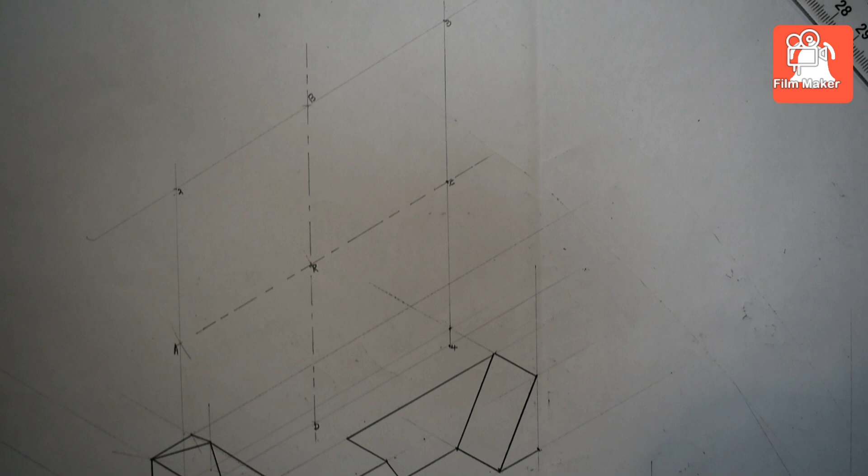I'm going to take my 30cm ruler and join the two longest opposite corners. Let me repeat that, since the camera for YouTube was off already.

So we created a square. The reference of this square, how did you start it? We were given the dimension of 50mm. This 50mm is a height going up, recorded right from here.

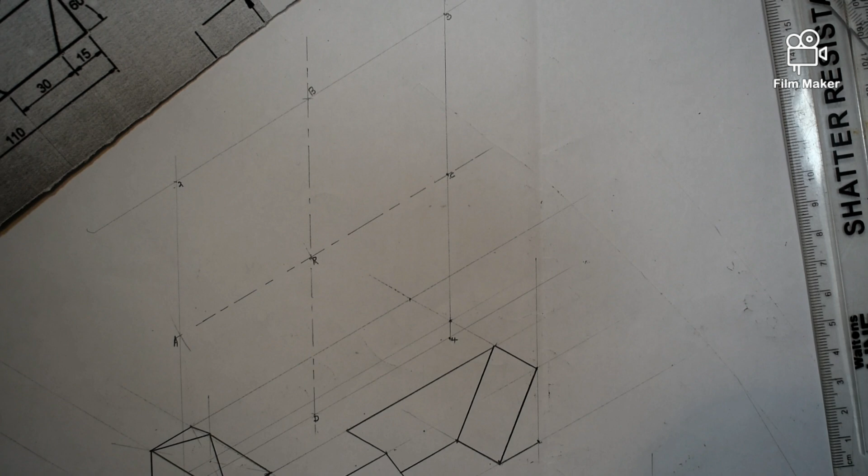How did you go to this point? We got to this point by recording 15 from here till here. Remember, this point is actually tallied with that one, which means it's the back part of your view, of this drawing we're doing. You can still say 15, which is that one, and 18, which is this one, so you get this point.

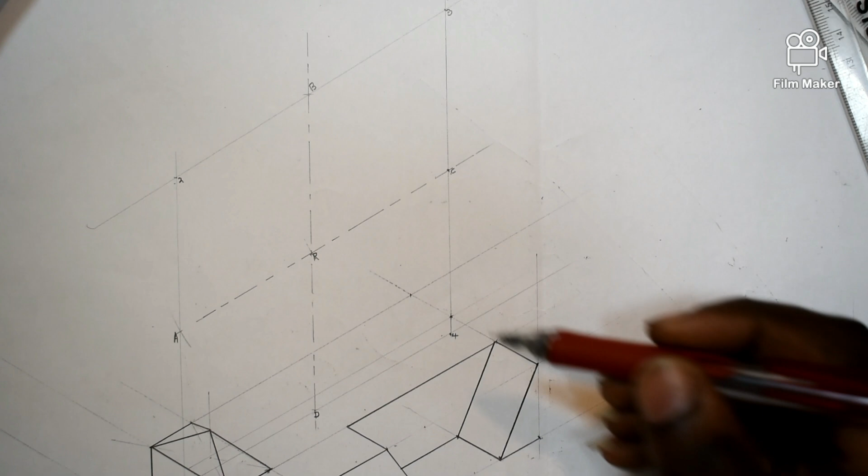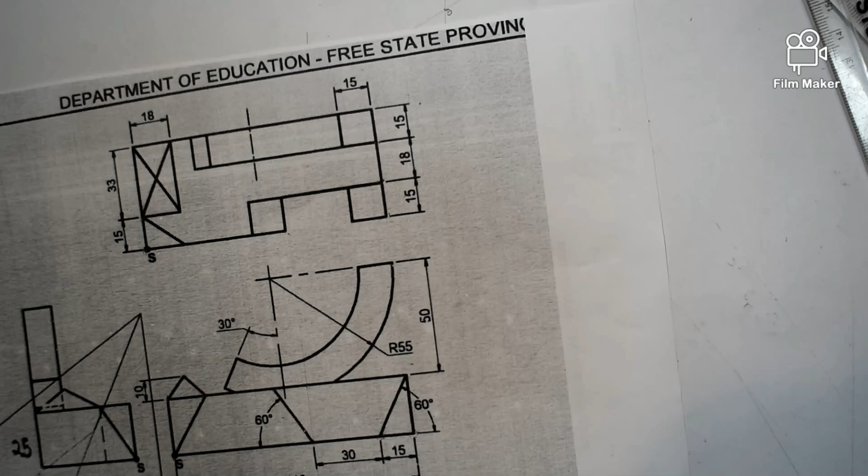You take this point vertically up, which we took. Once we took this point vertically up, we then recorded 50 - from here till there is 50. That 50 gave us the reference line on how we're going to create our box. It's the one that guided us.

So since this tallies like this, we do not have any point beyond this line - you can rely on that. Because we do not have to get any point, we then rely on where your point 50 ends, and this 50 you can even easily see it there by your right view.

It's giving you the horizontal center.

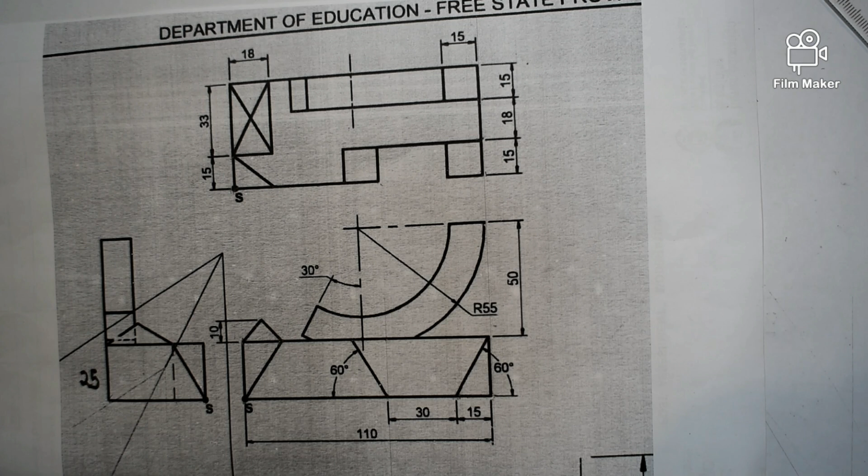All right, let's continue. So this 50 gave us the reference of the horizontal line - our 50 ends there, then we draw this one.

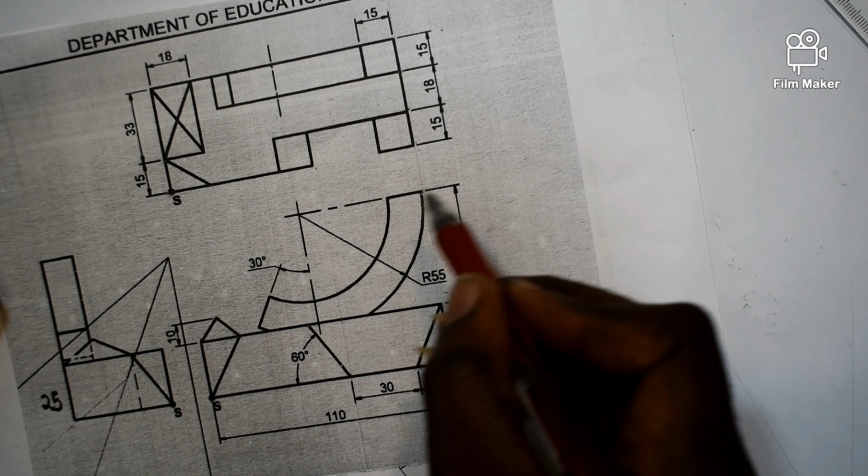After we draw that one, we then want to get this radius 55. Isometrically, we have to follow the isometric method, so it's radius 55. Then open your drawing compass to 55.

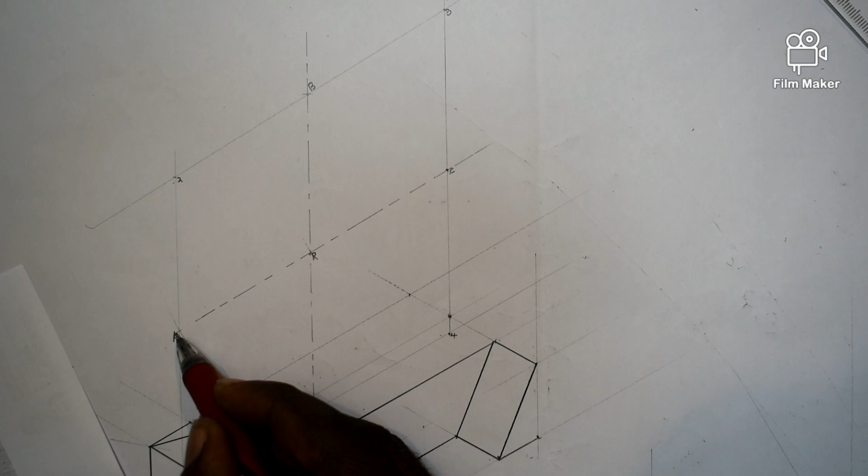Then you place it here, then you mark here, you mark here, so that from here till here is 55, and from here till here is 55. Then the first one that you got, we then say it's our horizontal, our vertical center, which is this one, and it's A1.

So let's continue - I just repeated this because the camera for YouTube was off and I didn't realize it.

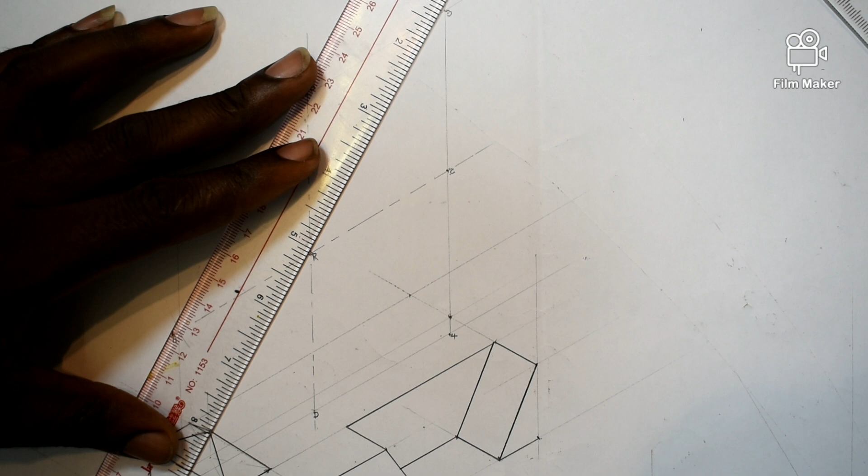Now it says join the two longest opposite corner, which is 1 and 3, and this line has to pass exactly point R. If we are at the right track, 1 and 3, you can actually see it's passing exactly point R. So which means we are still at the right track, my guy.

So all the points or lines that we're doing at this moment, they're supposed to be faint.

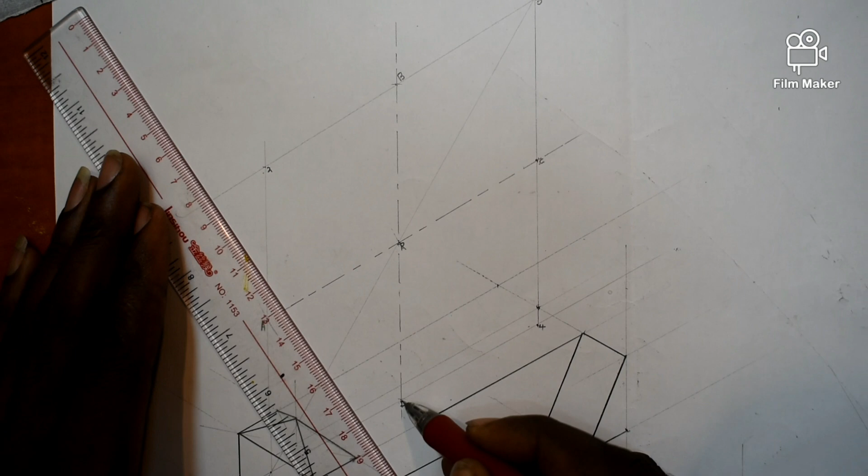All right, we've joined the two longest opposite corner. We're going to join the center to corner, corner to center. So D, which is the center, to 2, which is the corner - corner to center, center to corner. Remember, is that one, which is B and 4.

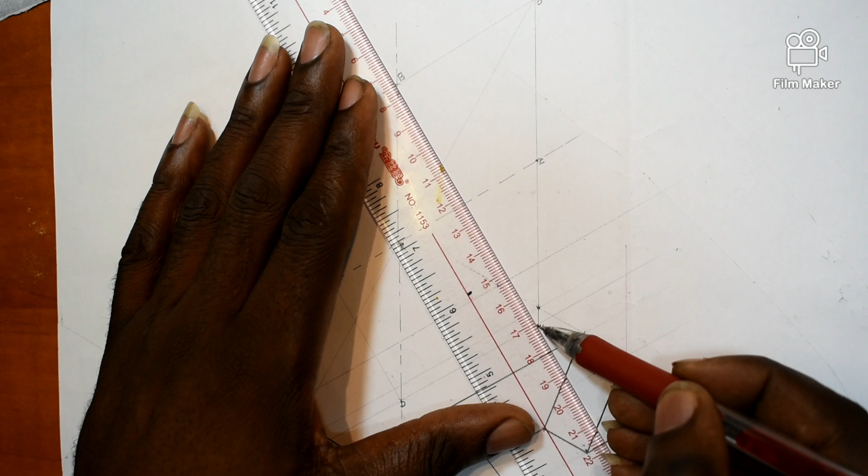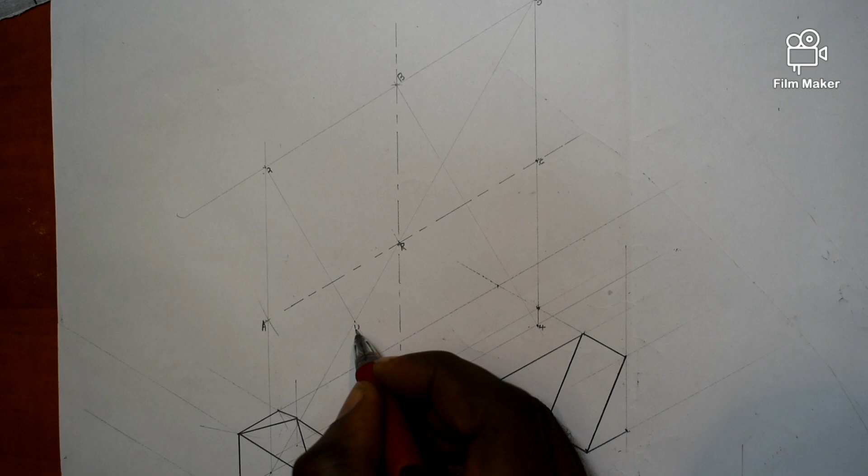There you go. Right, the time we're joining the corner to center, center to corner, our longest line was cut. So this one is going to be Roman figure 1, and that other one is going to be Roman figure 2.

What do we need actually - do we need these Roman figures or what? So now I want to start by getting this arc of mine, this arc of mine.

You have to be very careful - I'll be very slow when I'm doing this one, so that we understand it better. It's supposed to generally go up until at your vertical center line on it, but double check your right view is cut. So which means, how are you going to get that?

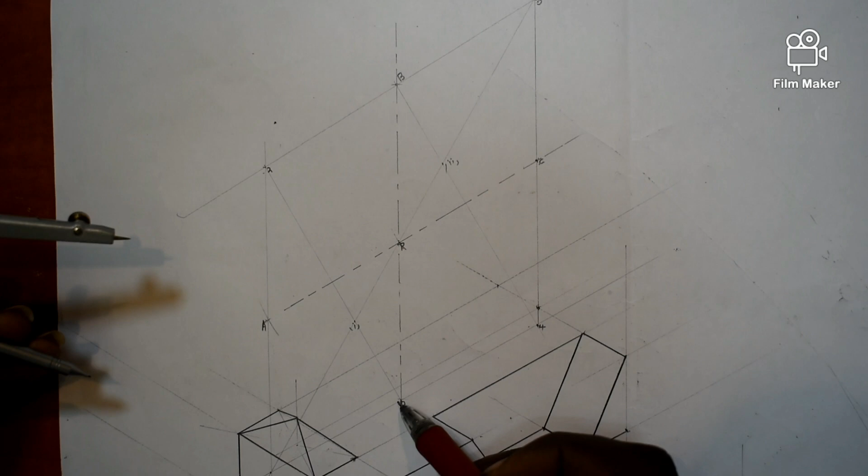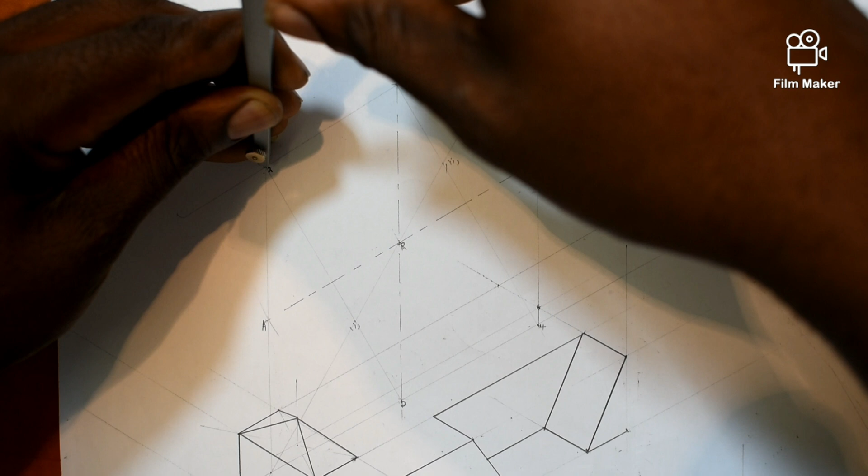You're going to use point 2 and C D. Place it at 2, supposed to be big, 2, there is 2, further extended to C and D. There you go.

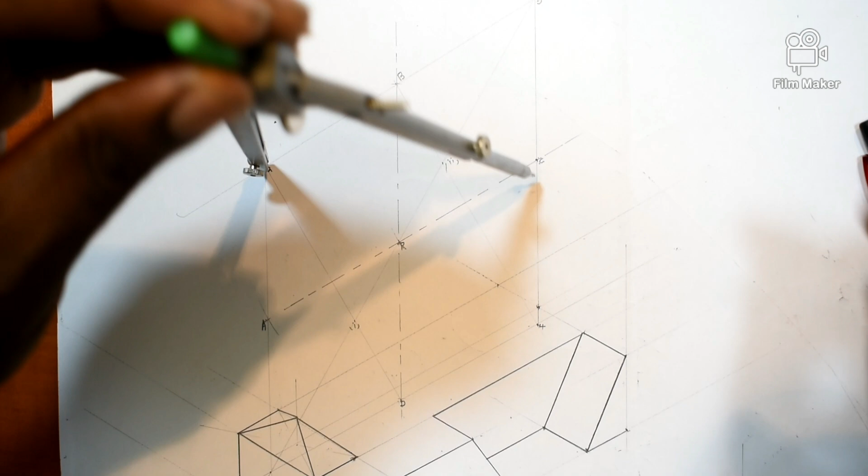Draw it from C, dark. Remember, where do you have to stop? Trace it, dark, dark, which means I have to stop here. Because from here till at C, supposed to be faint, till at D supposed to be faint. But from here till here, supposed to be dark.

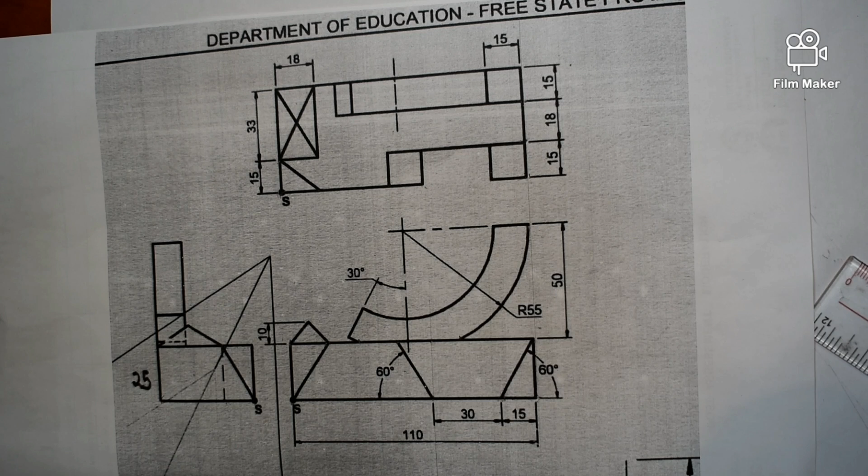So which means, as from this point, it has to be a horizontal straight line. As you can see it right from your right view, it's a straight line. It's going to be a horizontal straight line till where we let it come out by itself, so it's not going to be dark till there, you understand.

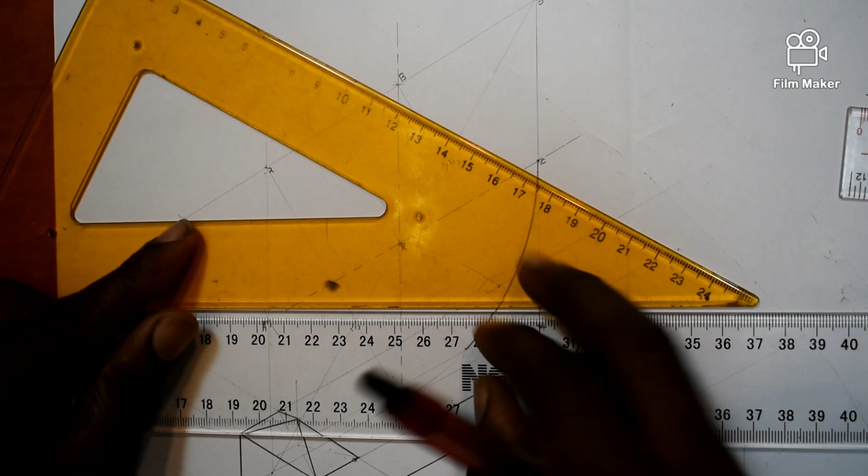Once I get that, rely on these points, rely on these points. Now I can come back and take this point C a little bit back, you understand. But this is the thickness. We are told it is of a thickness of 15 millimeter, going this side and going this side.

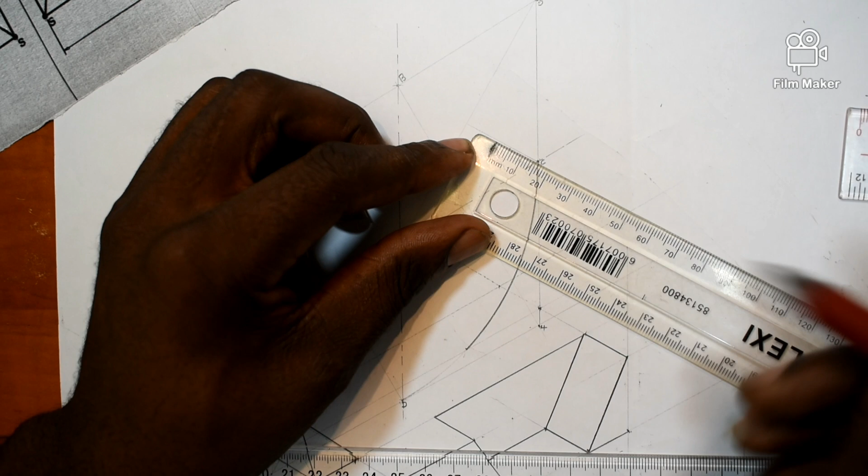So which means I can simply record the 15 millimeter till there, dark on it. You understand? So again, this side, dark. From here till there.

So you must always have strong points to rely on. You must always have strong points to rely on. So from there, where is my ruler now?

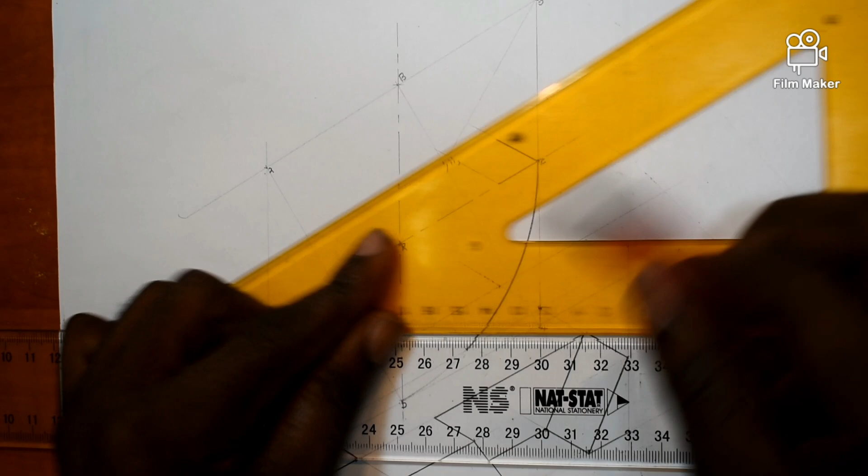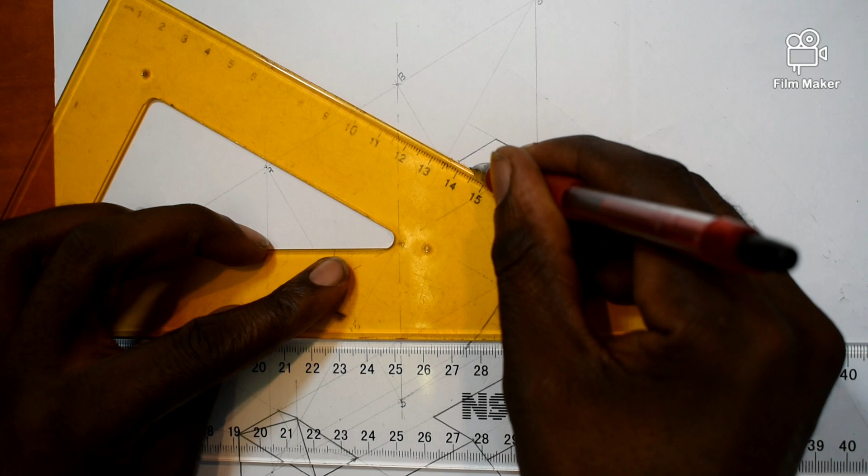So now, just construct this one faint, and have it dark from here till right there, you understand? And from here to right there, dark, you get it?

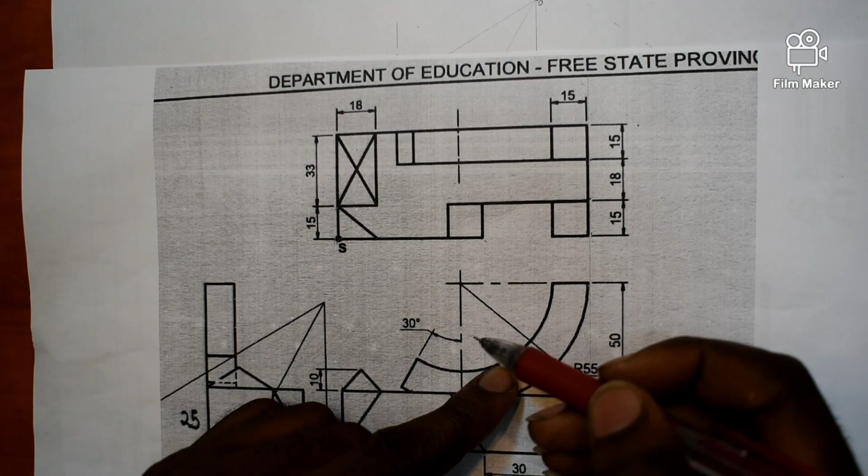Right, so what is going to happen now? So this arc of radius 55 is actually parallel to this one. So hence, if these arcs are parallel to each other, I can then rely on where you were placing your drawing compass the time you drew this arc.

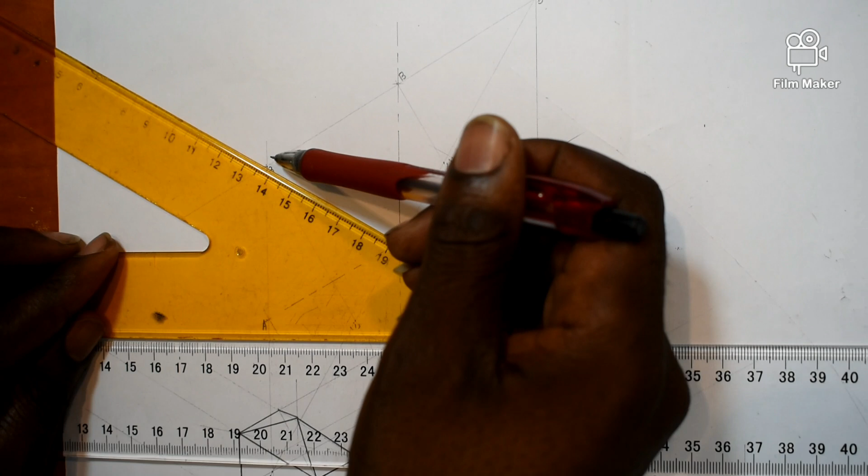You're placing your drawing compass way at point 2. So which means take this point 2 a little bit back, my brother. There you go, you understand? And then come to say that is from here till here is 15 millimeter, which is this one on it. So which means I can record the 15 millimeter from this point 2, from here to right there, you get it?

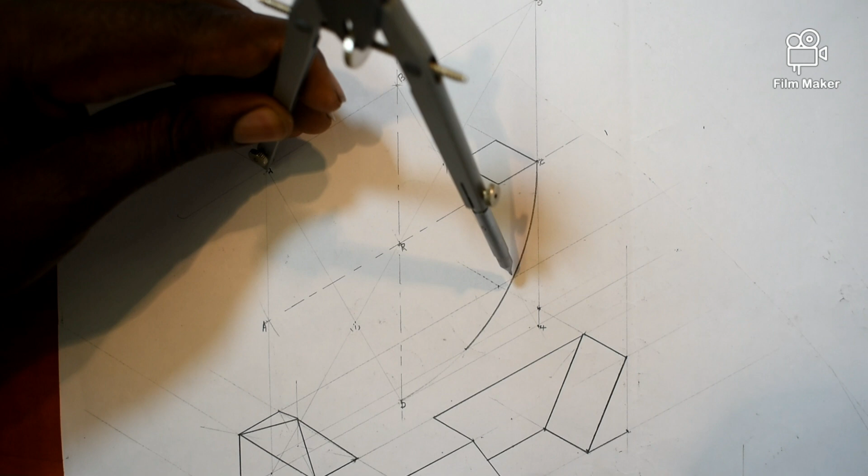Open it. If you don't do this 15 millimeter, you can simply just place the drawing compass at point 2. Okay, I drew this arc like this. Now you'll be placing it along this line, but putting your pencil lead way at this point. You understand? So now, bring back your question.

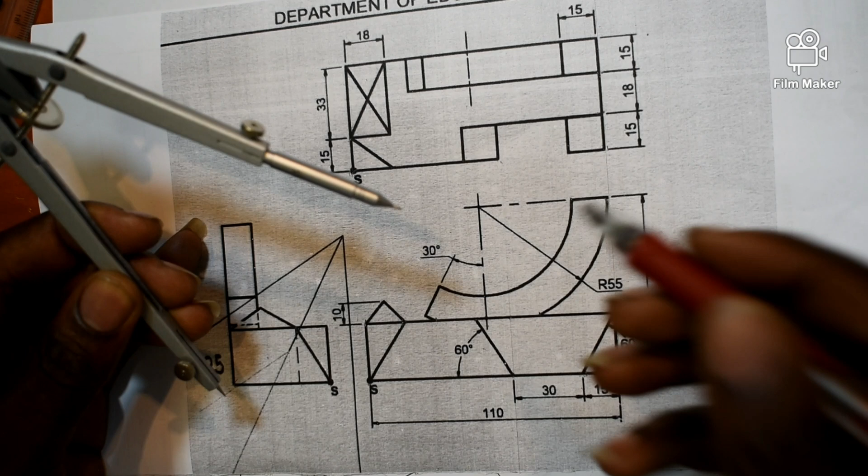And now, what I know is that it's supposed to start from the horizontal center to the vertical center to be dark. That's what I have to rely on when I'm drawing the second one. So, place it here where your 15 ends, which means come back a little bit. Understand? And then now draw it from here to right there, dark.

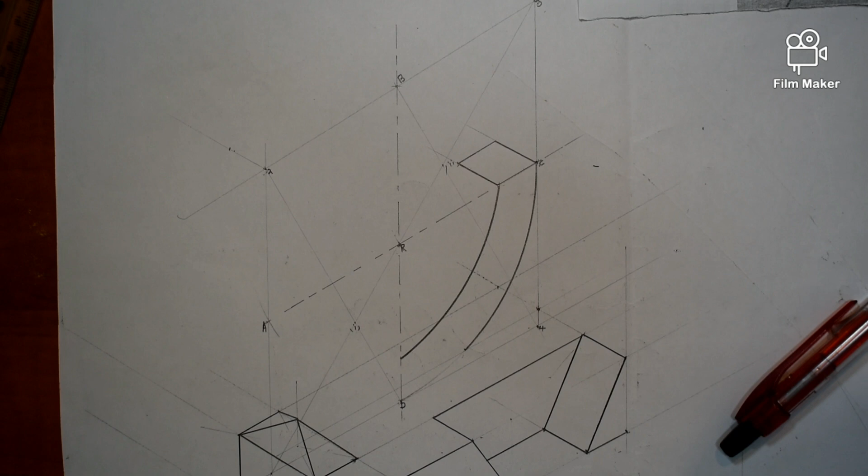So you must always have points to rely on. You must suppose what I see is that the second one, we can see it clearly. You understand? Starting from here till, but the first one is actually vanishing out there. You understand? So it's supposed to be like this.

At the moment, I can mark till somewhere here, even though I can see what is continuing till somewhere, but at the moment, let me leave it here. So now, what is going to happen now?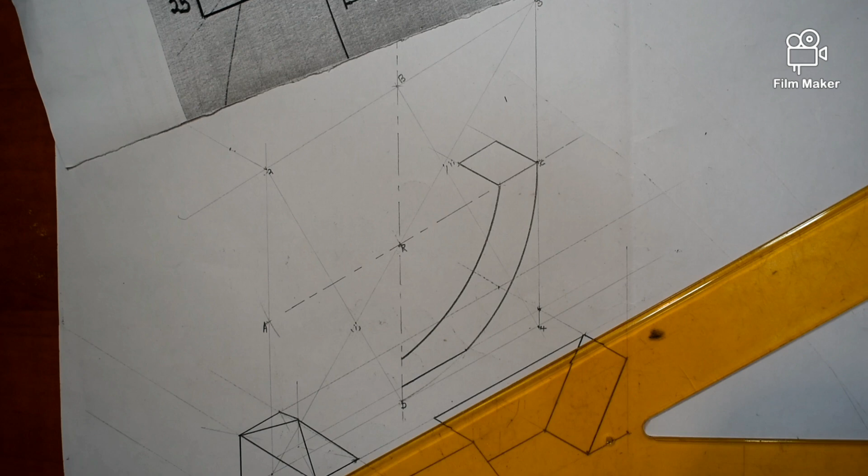Check this. If we were drawing the full isometric hole, we were going to use what? Roman figure 1. Place a drawing compass at Roman figure 1, further extended to what? To A and D, which is this one.

You see it's coming nicely, which is D and A. I'll draw it faint at the moment because there is something happening here. Understand? Okay, so now we are facing this angle now.

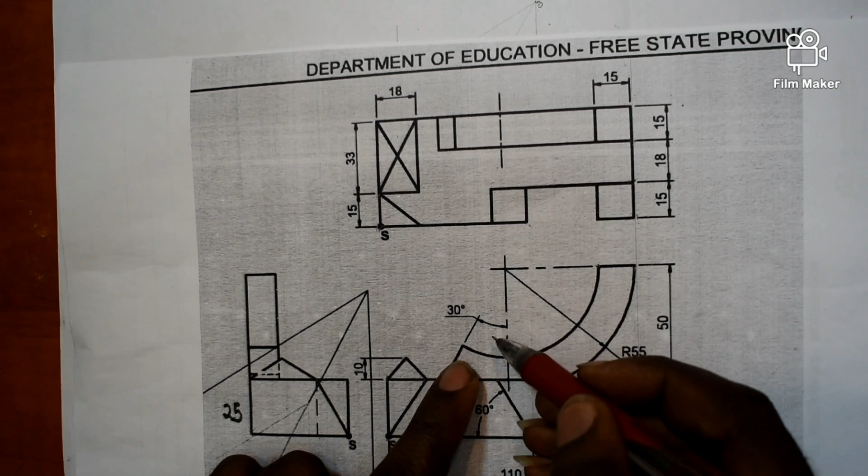Okay, now let's go back and deal with it on true angles and true dimension. I'll just come this side. Let's construct a faint horizontal line, vertical line, and the horizontal line.

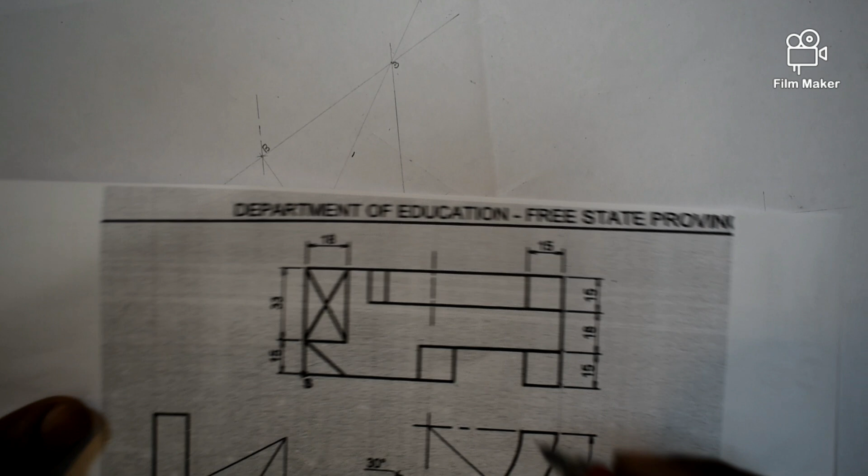Okay, from this point I want to open angle 30 degrees, because the set is angle 30 degrees, you understand. So this is angle 30 degrees, angle 30 degrees on it. There you go, faint. There you go, faint.

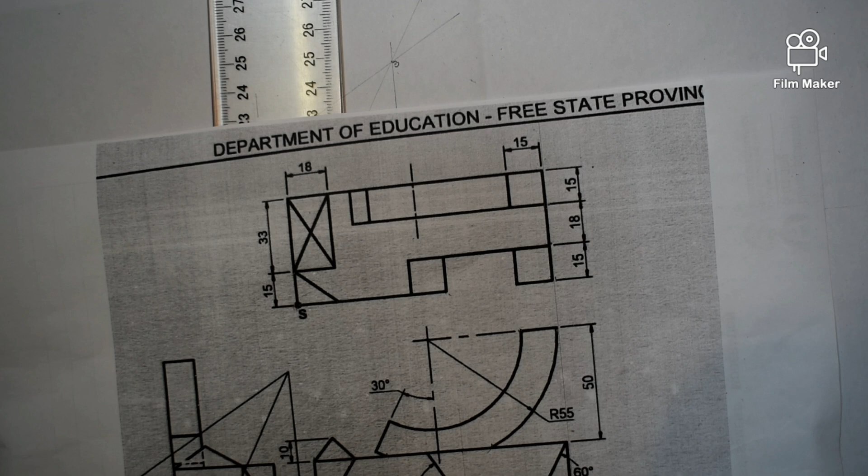Now, again from here till here, from here till here, I will even start with the 55. So I'm going to open my drawing compass to 55 radius, 55, which is that one. I'm actually looking for that point, you understand, that point. So open it to 55.

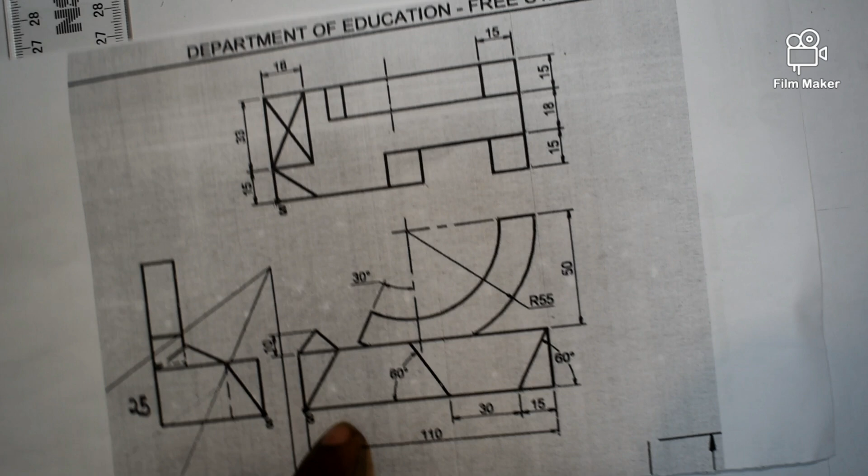55. There's 50, this is 55, you get it? Then after that, I come back to my auxiliary. I place it here.

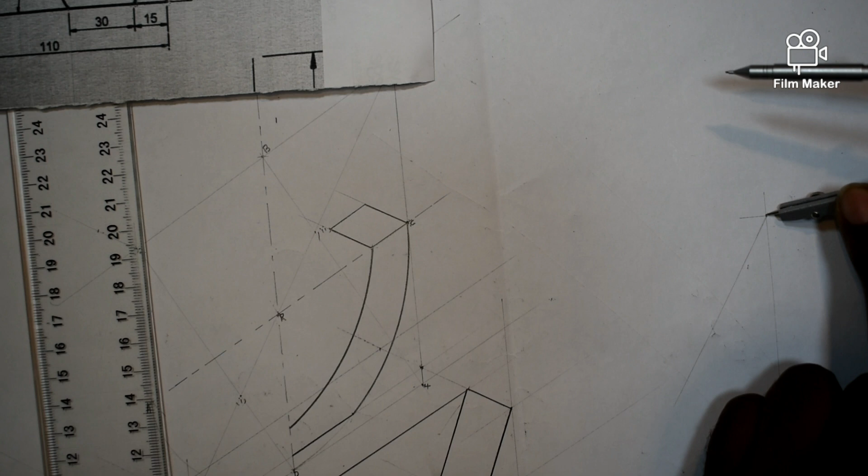Strike the arc of 45 of 55. You understand? So I've already gotten what I'm looking for.

So what I can do now, in other words, that is in my drawing, in my auxiliary, is right there. This D, this one in my auxiliary is somewhere there. Not even somewhere there, is this one. So now I can simply place my drawing compass at D.

Further extended to this point. Then from there, I come to my work and place it at D and mark along this arc that I just struck.

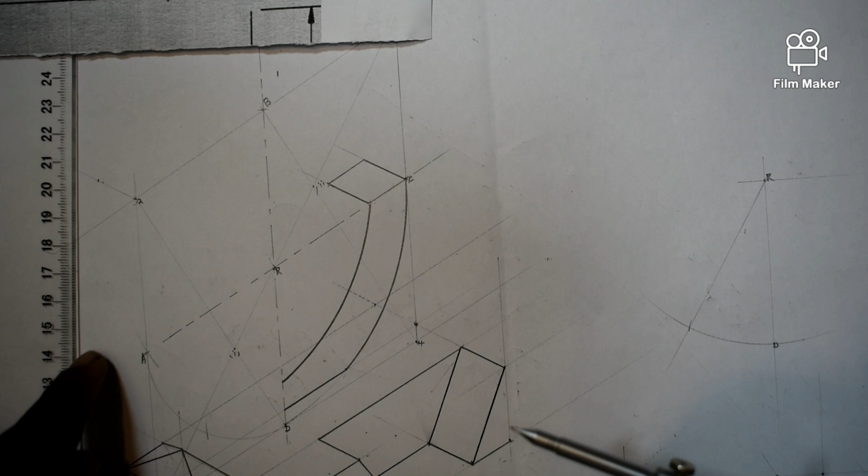After that, I'm gonna take this point to my R. It's good as if I'm getting this one from here till here. Take this point to my R. There you go.

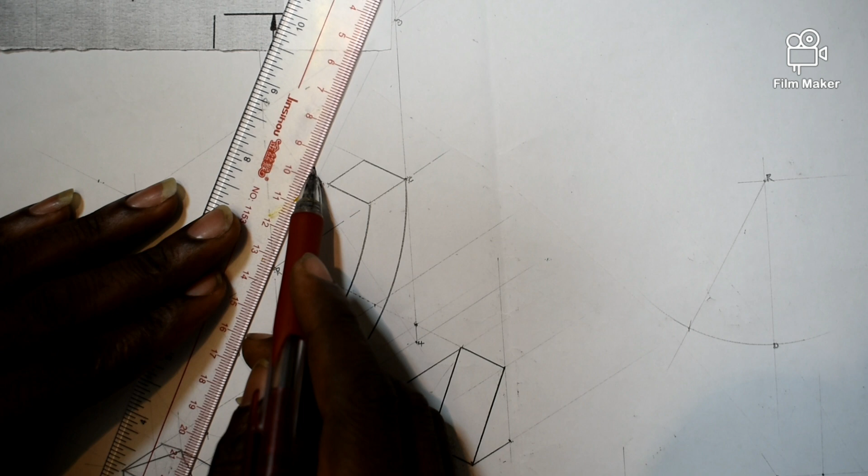So it is the one that is going to guide me now. I can go back to my Roman figure 1 point, place it there, further extend to A, isn't it?

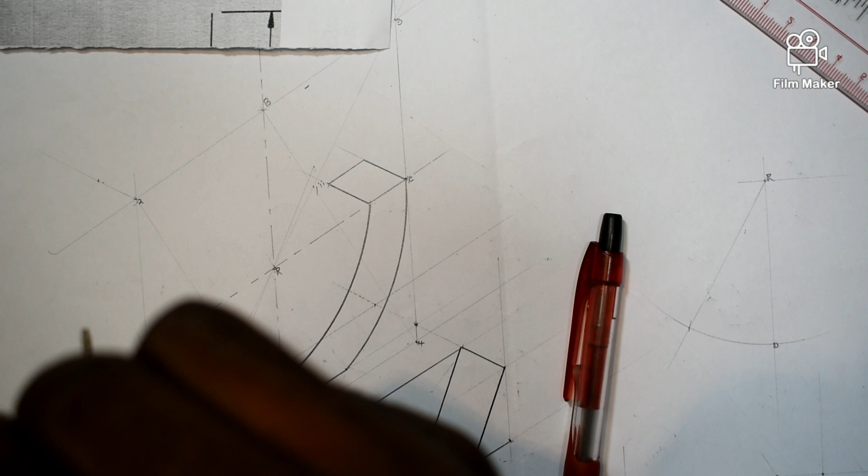But then I now draw dark from here. Check it nicely. Open just a little bit. Can now draw it dark from here.

Keep on shifting. Be careful from here till there. It's just a small gap. That's how it's going to be dark, my guy.

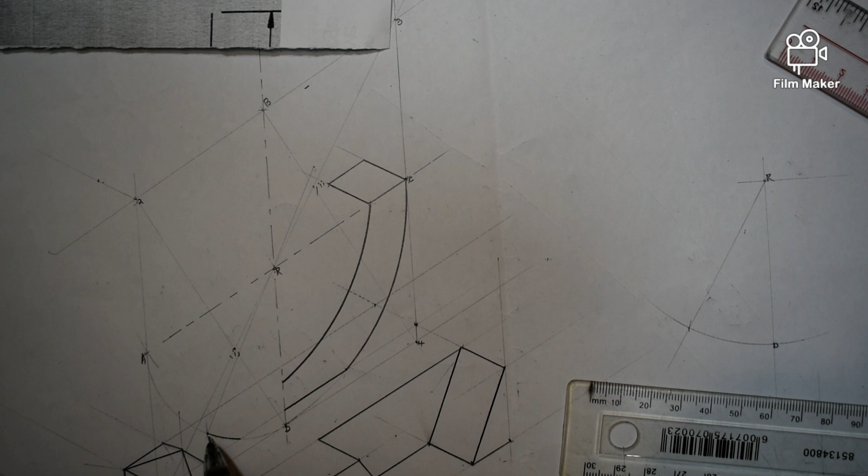From here till at B, if it was a full hole, it was gonna go like this, go like this. You start remembering it. Go like this, go like this. So it takes somebody to understand what isometric hole is. So the one that we have, it will be only dark from here till here.

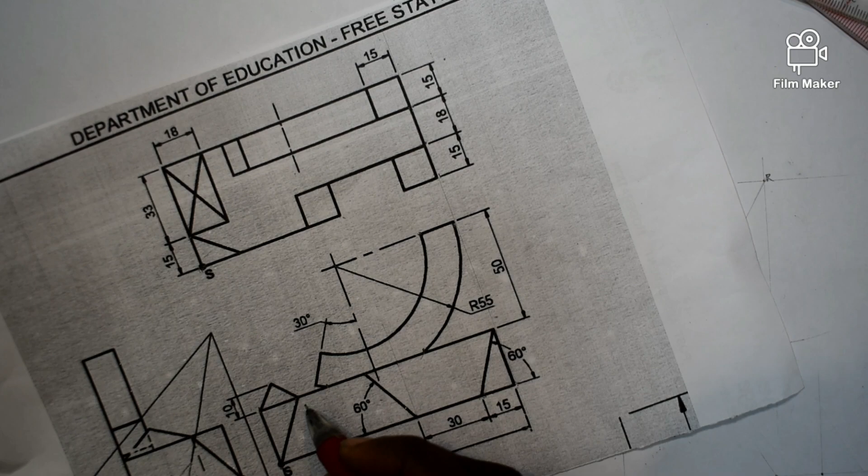So which means I can come back and record and have this one now, not faint, dark till right there. This one from here till right there, we've already gotten it. From here till right here, we've already gotten it. So now from here till here is going to be the same 15.

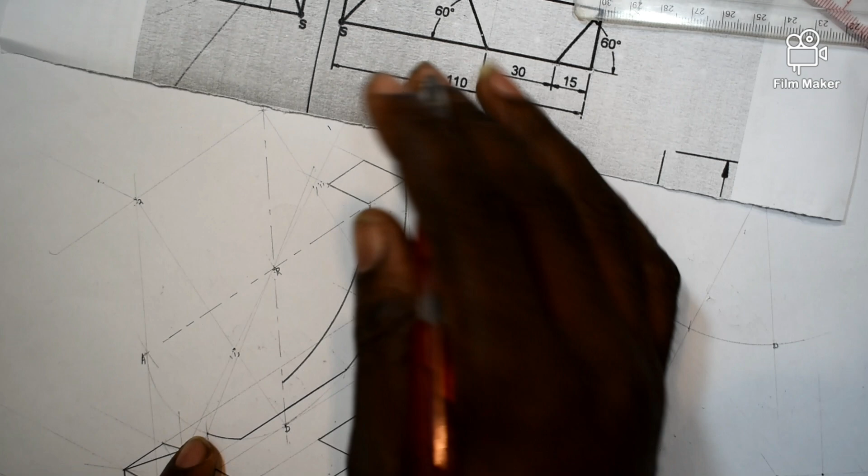It's up to you whether you record the 15 or strike the arc. But I would prefer you strike the arc. Pretend as if you are drawing the small one now, because if you were drawing the small one, it was gonna go from here, full hole, full hole, full hole, full hole.

You understand? So it's all gonna be like that, so that you have this one solid, which is going to be that one. Actually, we are done. We are done.

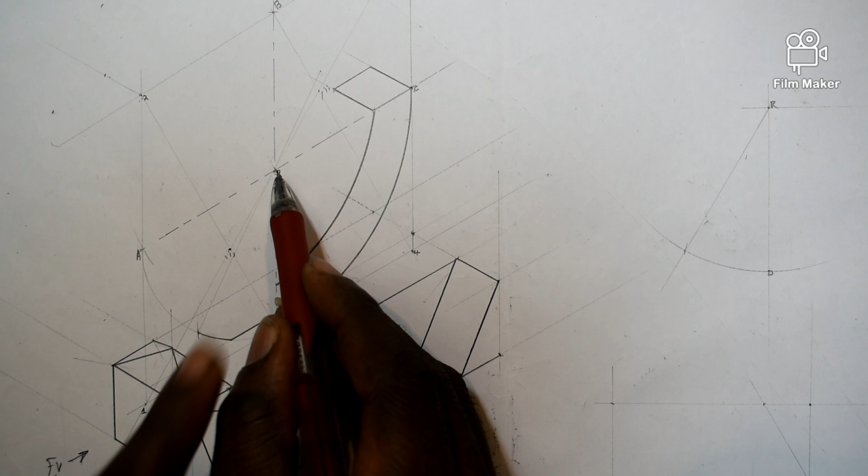Right, if I'm to such an extent, you know what I'm gonna do now? I'm still sticking to the very same R, radius R. I mean reference R. How? By placing my drawing compass at R, further extend to this point, and I mark here, and I mark here, and I mark right here.

Do you see that we're on the right track? Do you see? It's actually coming straight. If I'm placing my drawing compass from here till here, it automatically aligns with this one from here till here, which means the time we drew this arc, we were 100% correct.

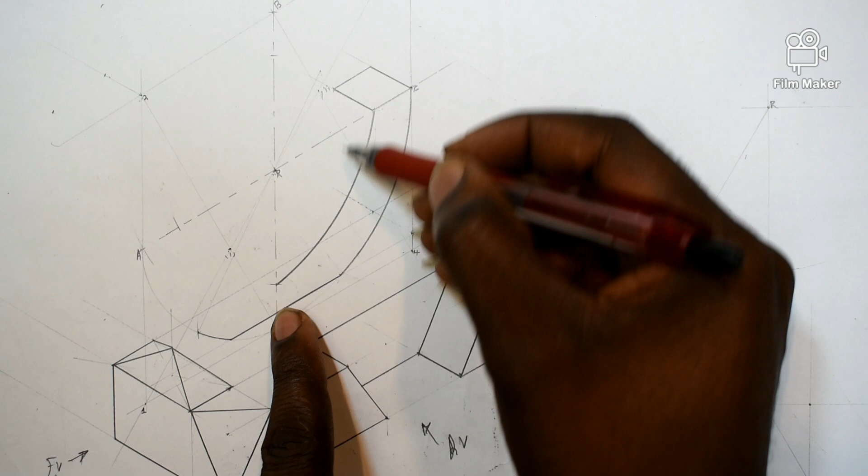Understand? That's what I like about drawing, because you can simply correct yourself. If you are going out of order, you can correct yourself to know why it's not tallying. So your dimensions must tally.

So now, which means I'm creating the smaller square. Paint with this one, which is going to be this one. There you go. The other one. There you go. The last one.

There you go. Do you see that it's still at the same longest opposite line? Check our work. You see that it's turning exactly at that point. Even this one, there it goes, it's turning exactly at this point. You are on the right track.

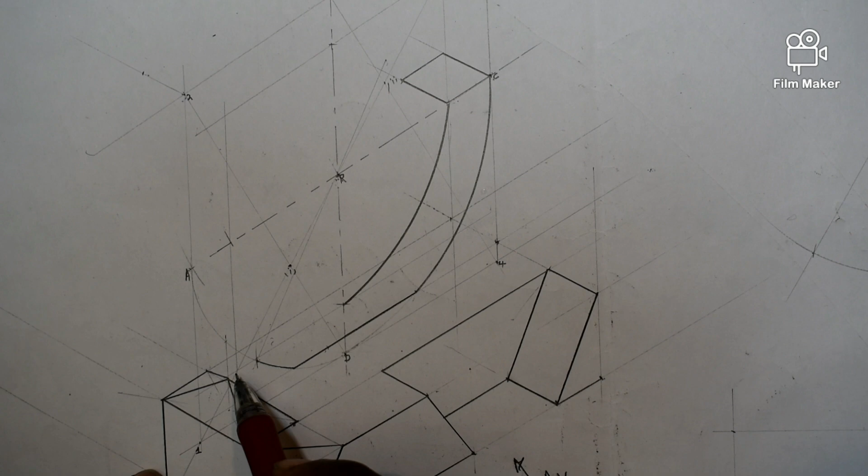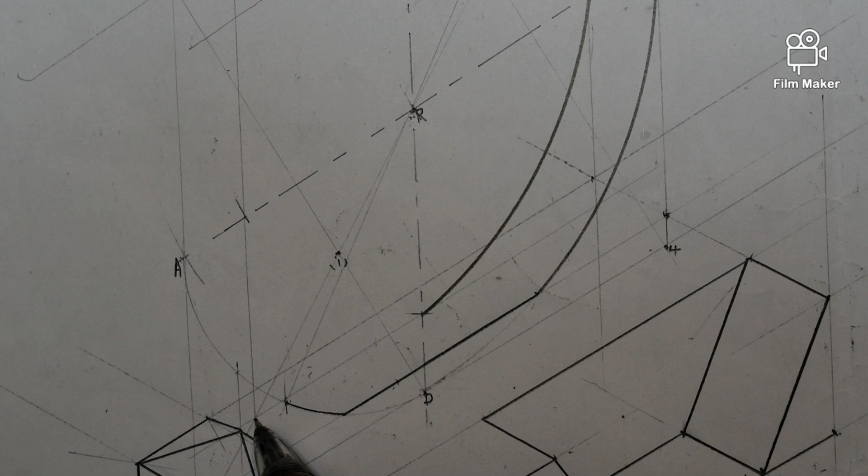Let me zoom in a little bit. You understand? It shows that you are 100% right. Why? Because this point tallies with this. This point tallies with this, because they are actually using the very same reference point.

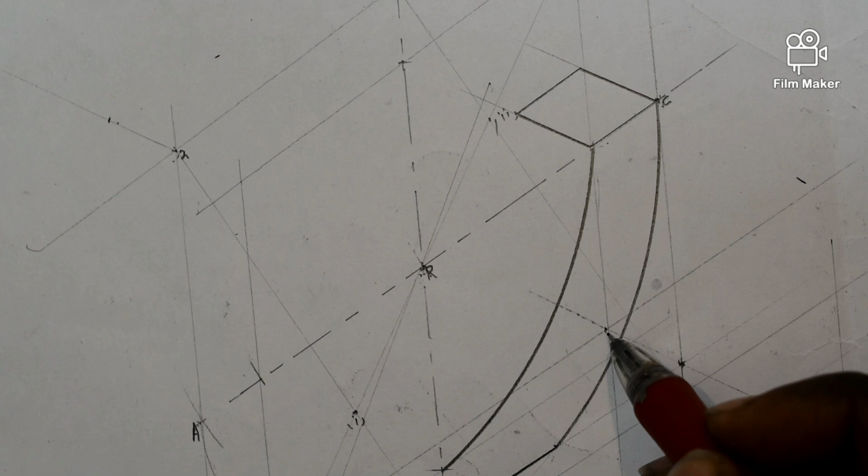Which means now, since they are like that, you can simply join the corner to center, center to corner, corner to center, faint. This is actually the point that I'm looking for. This one, there it goes, which means this is now shifted till right there.

So now I can simply place my drawing compass at this point, and if we were drawing a full, it was gonna be arc from here till right there. See, just open it a little bit.

You understand? If we're drawing a full hole, we are gonna be arc from here till right here, but then it's supposed to be arc from here till at this line, my guy. This at this line. Remember, which line is this one? Is this one that we got when we were there?

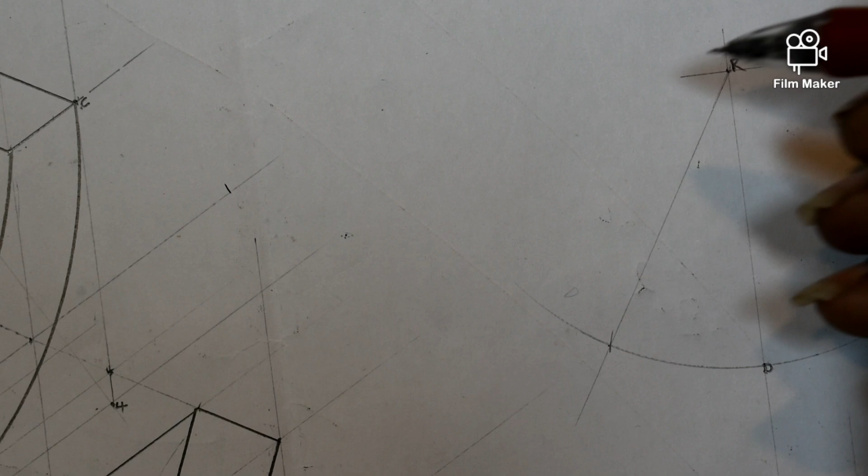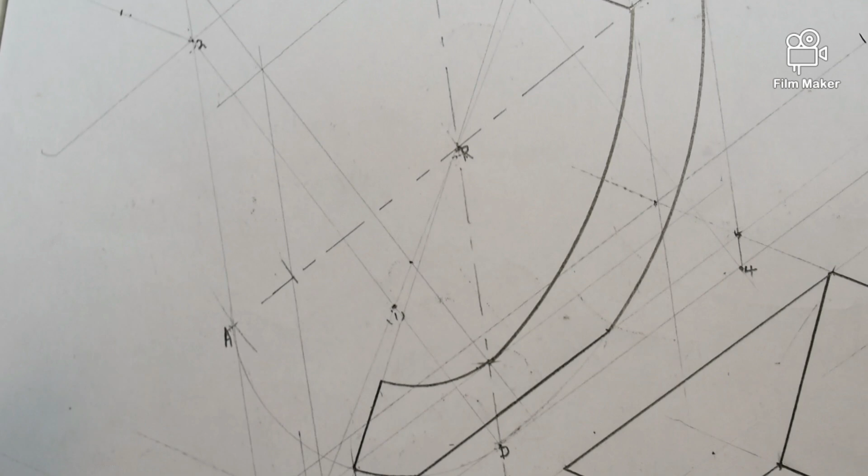We were looking for the true angles dimensional right from our auxiliary views. You understand this one? So this line, it was directed to your R, and it directed to your R, which is the same as this one from here till here. So once I'm to such an extent, now I can simply take this one at an angle of 30 degrees clockwise direction, and this one clockwise direction.

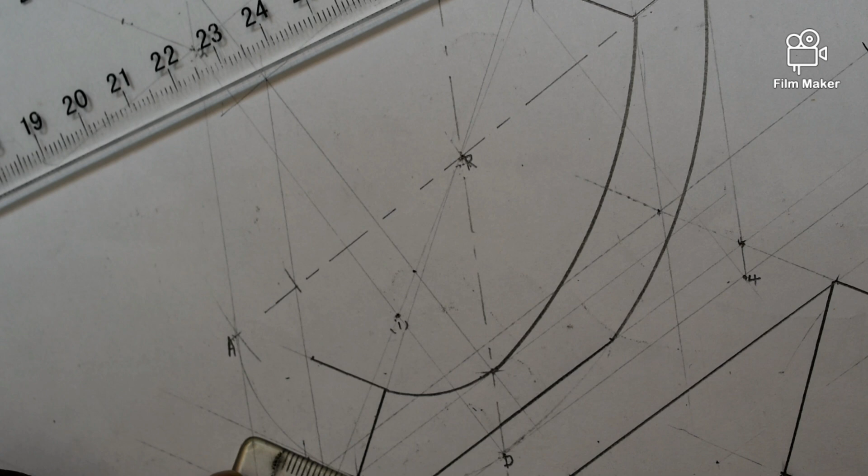So the set is still the same thickness, and 15. So which means I can record the 15 from here till there. We do not record dimension from nowhere. Understand? So that is why I firstly record the line that is at a correct angle. Then on top of that, we record the dimension. So dark from here till right there.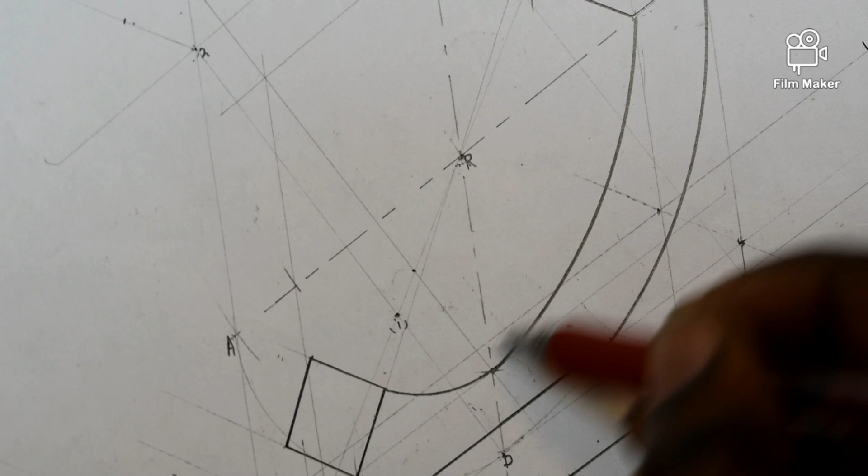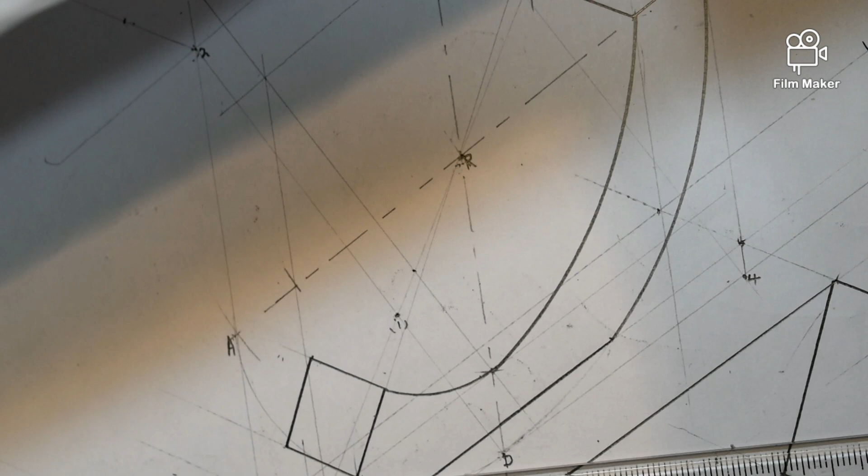Simple, straightforward. So where were you placing your drawing compass the time you drew this arc? Because now we must have the parallel arc that would be dark from here till at this vertical line of ours. Remember, this vertical line of ours, we are going to take it. Remember, we took this one a little bit back, this one a little bit back. So even this center has to be taken a little bit back.

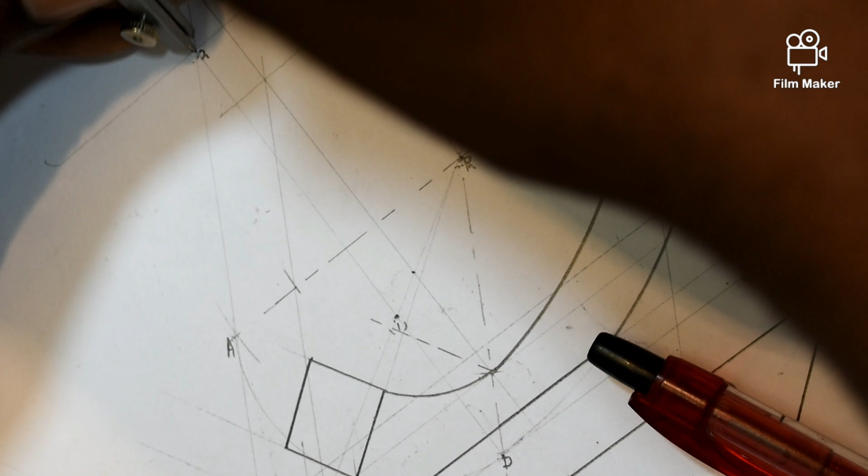So now I can come back and be like, okay, I was placing my drawing compass the time I drew this first one at point 2. That's how I drew it on it. Then now on the second one, I place my drawing compass a little bit back, but putting my pencil a little way right here.

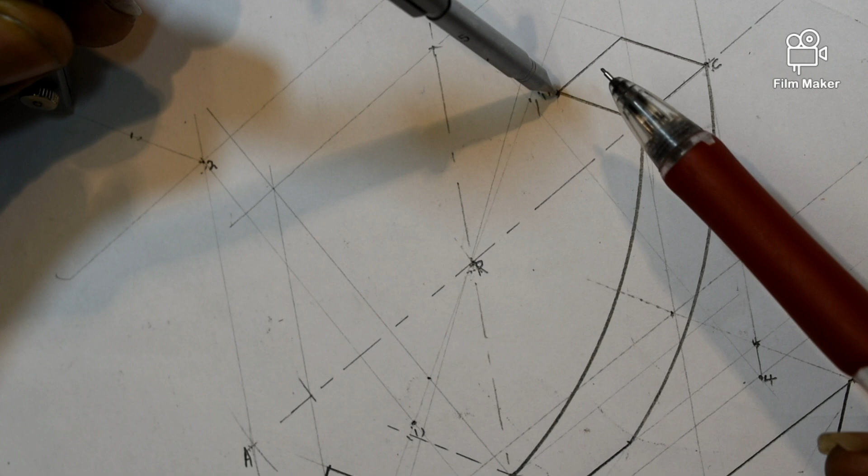So now I'm still looking for this one that would still have to be parallel to this one. So which means I have to go back along this line, but putting my pencil a little at this point. There you go. Now I can draw from here till at this center. How it is dark.

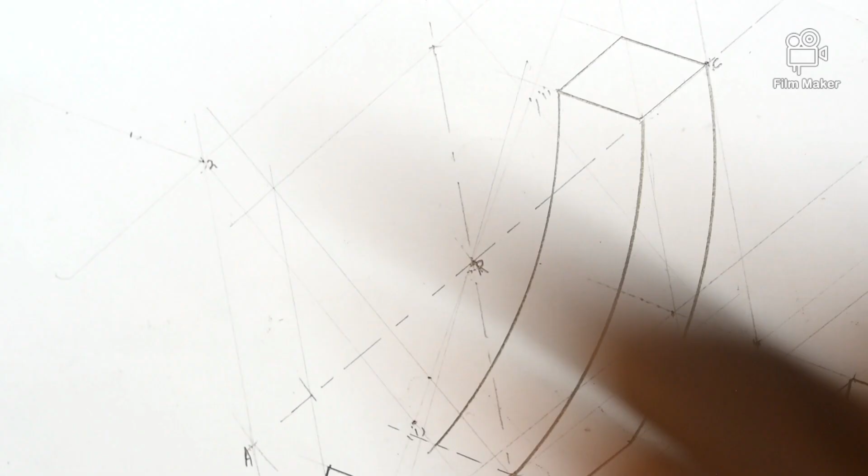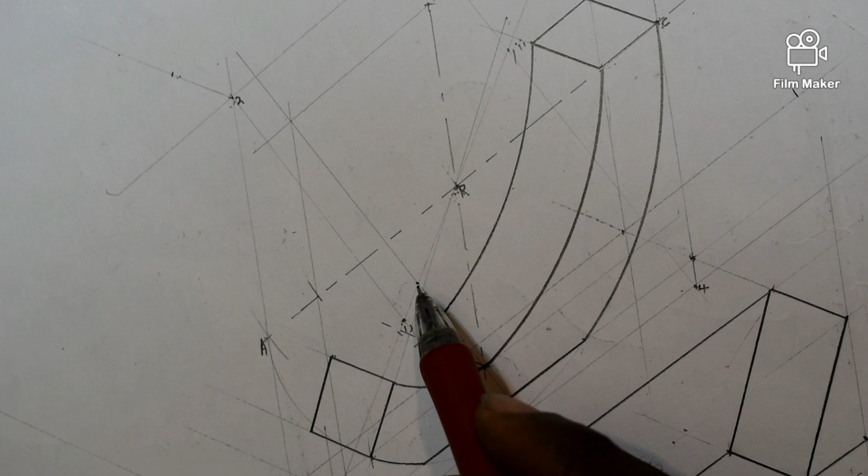Just like this. Then from there, what is going to happen now? So we are going to have a parallel arc that's going to start from here till right there. You get it? So how did you draw this one? You're placing your drawing compass right there, and so which means you are going to take this point a little bit back again. Take it back, then come back and record.

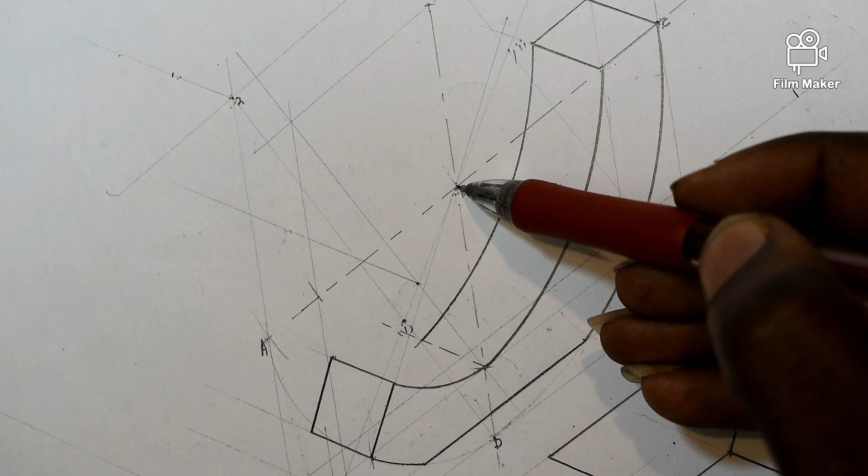Okay, I was placing my drawing compass the way right here. So remember, how did you get to this point? It was a process. We didn't just, it was a process of the auxiliary views through angles and through dimension. Understand? Then we took them to our drawing. That's when we took this line to our point R. So we got this one.

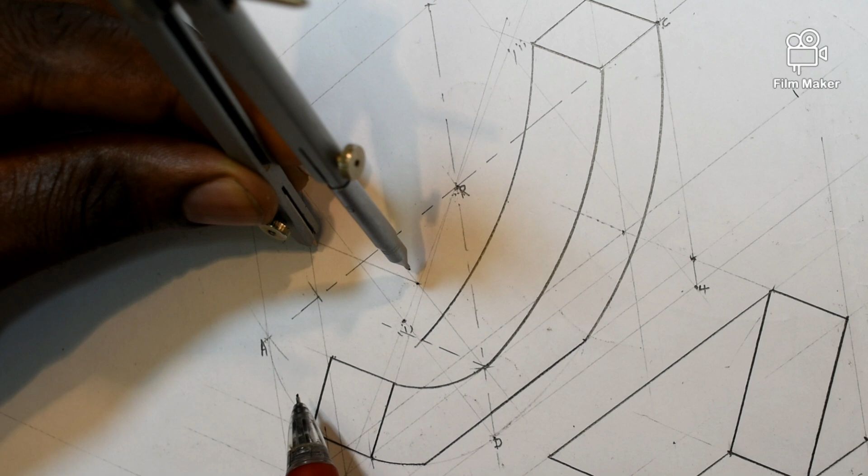Which was this one. From here, if it was a full isometric, it was going to be dark from here till here, which means now I'll be taking it back along this line, but putting my pencil light from here till here. If you don't want to do that, you can still record the thickness of 15mm from here till here, 15mm.

Understand? So whatever step you prefer, you understand? See, it's coming nicely. Doesn't even need some adjustment. Coming nicely. There you go. Simple, straightforward.

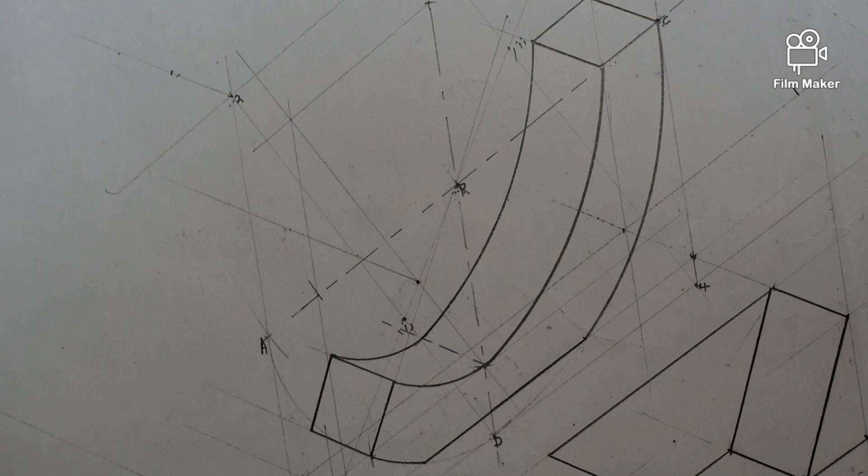You get it. So this is what was challenging in this drawing. So now I can come back and have this one dark. This one dark from here to here, and this one dark again from here to right there. So that was it.

Is there anything I left? Yes, there is something I left. This one is supposed to be dark from here till the ends. You can see it. It's dark there by your right view. Remember that this is the right view. So dark from here to right there. So is there anything I left?

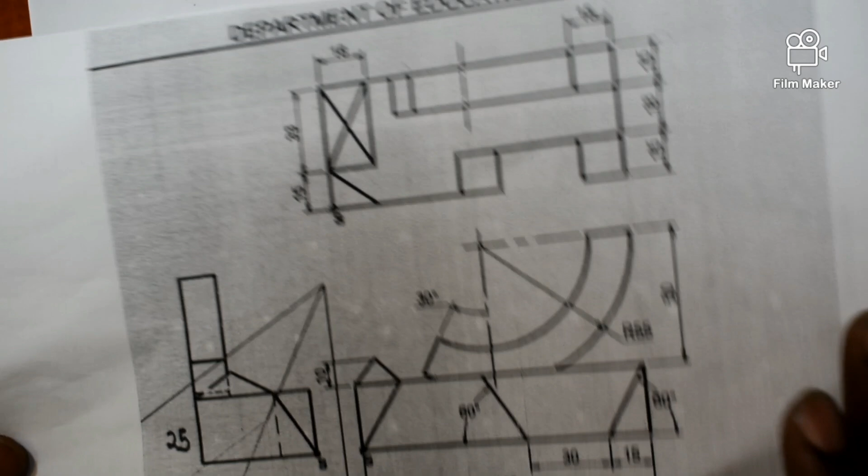Is there anything I left? So they didn't say it's a sectional drawing, because if it's a sectional isometric drawing, we're going to see the cutting planes. Understand. So it's not. It looks like it's cut. Yes, you can think, hey, this was supposed to be full. It looks like it's cut, but the caption is not telling you which is cut.

What you get that. So thank you very much, guys, for watching.